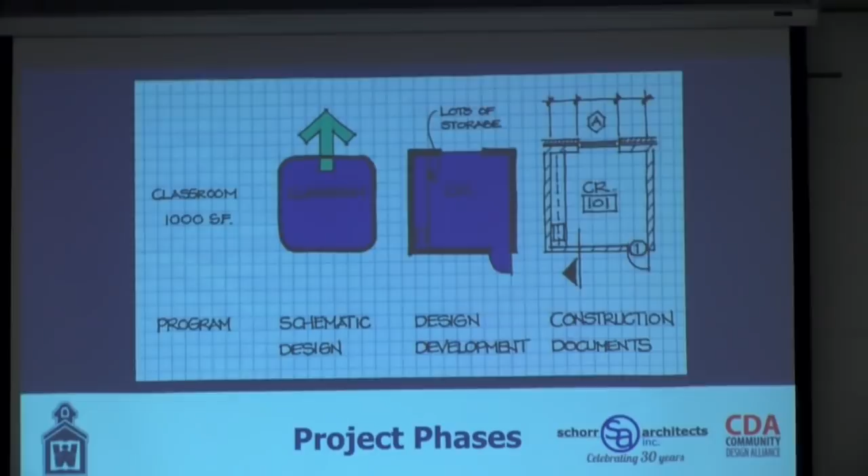Thank you. So the last time, if you were here, I talked about these different design phases, and I just want to briefly tell you where we are. The programming phase, when we were here the last time, we were still in the middle of that. And what that is is a listing of spaces: how many classrooms, what sizes, and it's a formula type of thing where there's a form that has all these different numbers on it. So it's a program of requirements.

We also did a little bit of conceptual design that you saw the last time, and that's what we've submitted. So for Worthingway, we have submitted our programming to the state, because again, we're partnering somewhat with the state on our process, and they are reviewing it currently. And while we're waiting, we have started the next stage, which you see on there, schematic design.

So in schematic design, what you're going to see tonight is more of a floor plan. It is not a conceptual plan, it is an actual floor plan, and you'll see the site plan. We're just starting to develop exterior elevations, and you'll see those at the next community meeting. Hopefully everybody picked up the floor plan outside, and on the back side is the site plan, so hopefully you'll have those documents.

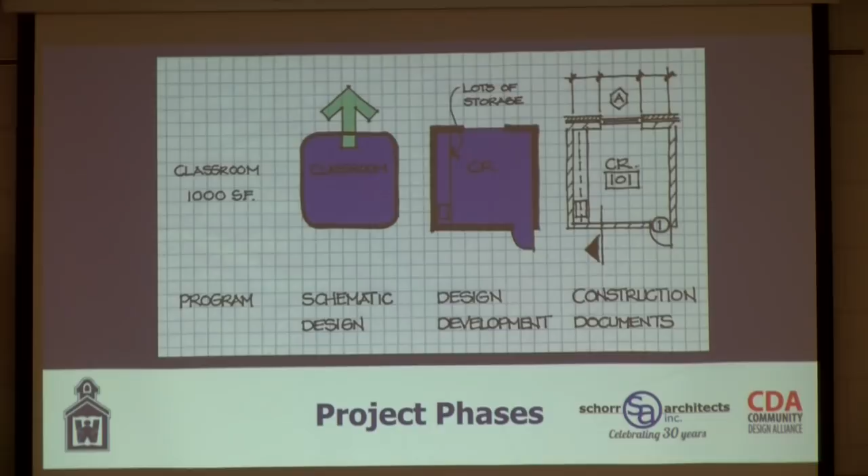So briefly, from those comments that we had received, there were some consistent comments quite a few times. I just want to mention a few of them. Security and safety, I think we all know, is primary, number one, and that was a lot of the comments. We also got a lot of comments about sustainable design and maximizing our energy efficiency, which we will do as we design the facilities. There were comments about outdoor space.

We had a fair amount of comments about making sure, and again, some of this was in the ed spec process, obviously, but that was out there a lot too, about making sure we do create and continue to have outdoor spaces. And you see here, when you look at this design, we have kept the outdoor space between the building and the track.

It has not been taken away. And then there were comments about restrooms. We had a lot of comments about restrooms and gender neutral, and I think you're going to see in the design that it's been addressed as well.

So since we've had our last meeting with you, each school has a site design committee. We had met with them before we met with you the last time. We've met with them again, and even since that meeting, which was just last week, there's been renditions of the floor plan. They've been given to Nathan and the staff here. They've had comments again. There was another meeting today with Nathan, and it's amazing how much has happened in 1 week as we've taken this design and tweaked it. And so there's been some modifications to the plan, and there'll be some more even after today's comments that haven't even been reflected here, but some great comments.

So the other thing that we've done too, which was a comment, and we knew we needed to do this, is we have met with the city of Worthington twice relative to bus drop-off, parent drop-off, parking on site, and you're going to see again I think a big difference to what we had before, because there were great comments from the city. We definitely needed to have those, and plus the community comments have helped us drive our site design.

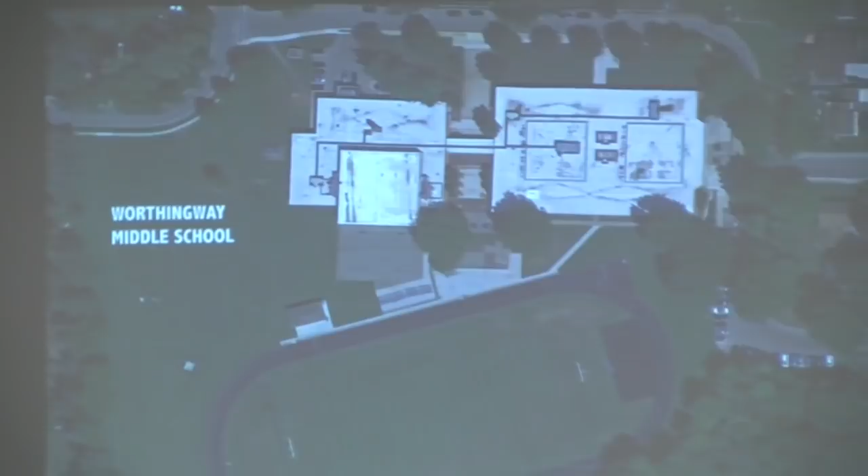Where does the structure work the best? Where does the mechanical and the plumbing and the electrical work the best? And how do we make this a very energy efficient building? How do we make it a very cost effective building? Because it's easy to say, let's start from scratch, let's build a new school, but we don't have that kind of money. So we're here trying to take advantage of what assets we can leverage and replace the assets that we can't leverage.

So this is the existing site. Again, we have got this one-way bus drive coming in west to east. We have Larimer kind of doing a small loop back to Guyer, back to Larimer. It tends to work because people are very practiced at it, but it's very tight, and parking spaces on the site are almost non-existent. There's 25 or 30 spaces here. So the parking lot for the school, as I said last time, is the neighborhood because it needs to flow that way. We're hoping to reduce that demand dramatically with what we're doing. So this is what we presented at the last meeting. We talked about how the building gets used.

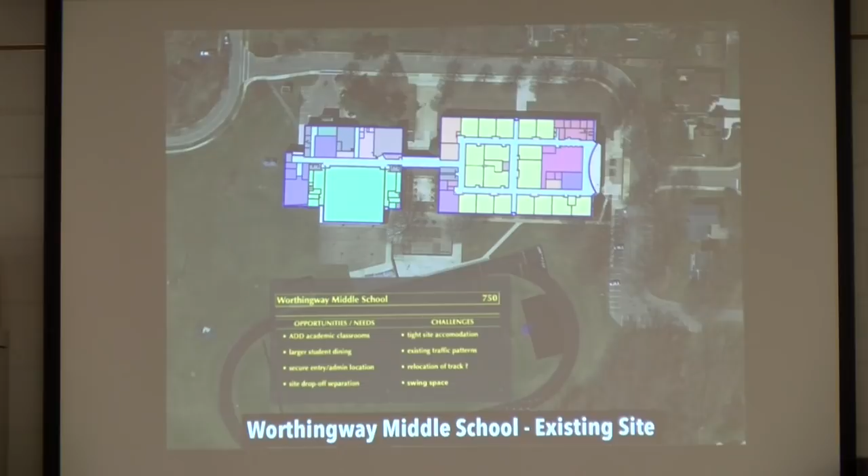The yellows are general classrooms. The other colors are supporting spaces like administration, media center, athletics, art and music. Those are the kinds of things we're trying to rework in this school. And then our number one objective is we have to keep this school operating, and successfully operating, during the time we do this project. So we had to make some decisions that have to do with the transition as well as

the end product. So in our first two meetings, the city manager pulled all the city engineers, all the traffic engineers, all the tree board people, all of the rules and regulations. The fire marshal came in, we sat down and we talked about all those rules. They wanted to address traffic. They didn't want to get into where art rooms and music rooms are, but they definitely wanted to influence how we were going to improve the site.

And the idea that came from our initial presentations was we were still going to have parent traffic here and bus traffic here to kind of keep it the way it's been. The city manager, Matt, said, what if we were to get a much longer, much more flexible, and much larger sort of parent and car drop-off at the north end of the building, take advantage of that, create a new front door, because we're tending to believe we're going to lose our current front door and our current front of the building to demolition to keep the building more this direction.

And so this idea has some strengths, and we're here tonight to sort of see how you react to those strengths. It allows for east and west egress. It allows for people to come in one way and go back out the same way, or come in this way and go out this way. What we like about this is it has a long, open, safe curb where we can drop kids off from cars, and we can get into a secure front door of the school.

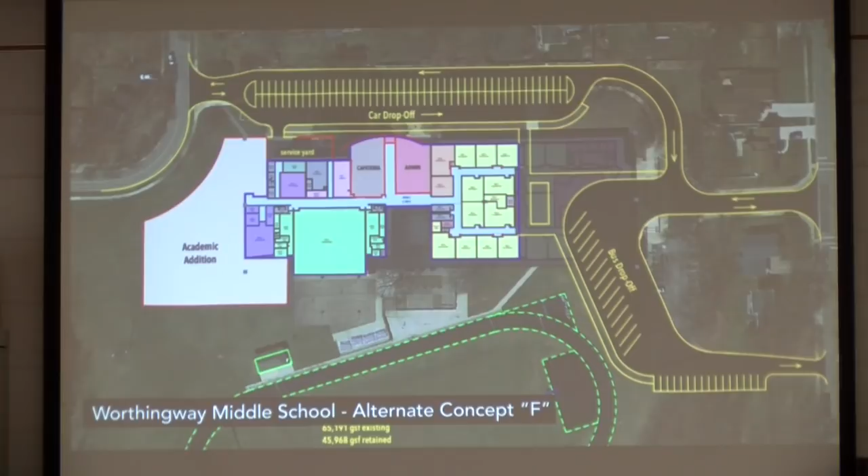And so we're going to really impact the on-site parking. We'll have about 100 spaces up here and maybe 50 spaces more here, and that's way more than we've ever had on this site. It's not a maximum number, but it is a decent number, and I feel like we'll get a lot of people off the streets if we're able to accomplish this. So this is an assumption that the city has kind of worked out with us, and based on that assumption, we've moved forward with the building design to try to adapt to that.

So we got a complete survey of the site. We know where every stone, every curb, every sidewalk, every tree, every parking lot stripe is currently with this survey. It's very detailed. And as we lay our concept over it, we know what we're going to impact. We know what we don't have to impact. Again, we aren't changing any curbs or any edge of pavement on this side of the site.

We're going to expand it to accommodate some parking. That's going to happen because we're going to take some building out here that'll allow that to happen. We have 3 trees here and 6 trees here that we're going to impact with this site design. To get that many parking spaces on the site, we're going to have that. It's not something that I enjoy, or to tell you that I enjoy.

And the city has already said we'll have to replace those in kind on the site in terms of our total tree count. So we'll plan on improving some of the tree cover of the site, and especially focused on replacing these 6 ash trees and these 3 maple trees. And again, not ideal, but safety and traffic flow seem to trump that as much as possible. And so we feel okay about that.

The other concept here, you can see the building that's left, is we're taking half of the classroom wing away. That allows us to do all these improvements in site space. It allows us to have room for buses on this side. It allows us to flip this around.

We're looking at how to make the addition to the building compact, to make it capable of being done while school is in session. So we will build a west addition to this school while the east addition is still being used by students. And when this is ready for them to move into, we'll move them out of this wing and we'll do the changes over here. So there'll be no point in time where there's not enough classrooms on this site for kids. We'll always be able to have a fully operating school here.

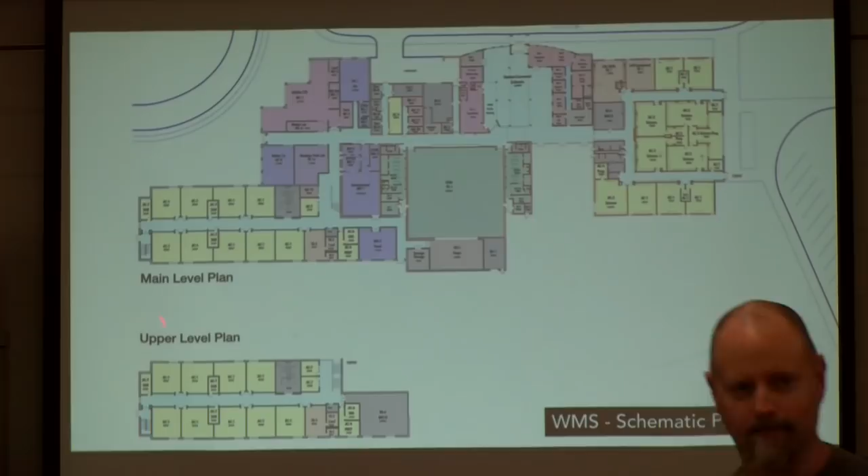The yellow areas are the academic classrooms. We have a STEM wing where we have science and math. We have a humanities wing where we have English, social studies, language, those kinds of things. Someone asked me today, what if we want to go in the future to a team teaching method where we have a science and a math and an English and a social studies room that work together in teams? That can happen. We know that our existing science labs have a few special features, but not that many. They're a little bigger, but not a lot bigger.

If we decide to rework this school down the road, I don't think we're doing anything that's going to prevent us from teaching differently. And that's a huge goal for us, is not to limit you in terms of telling you have to use these rooms as science rooms. They'll be better equipped as science rooms, and that's what they've been for the life of this building. But any building or any classroom in a school could be a science room 10 years from now if you want. So I think that's important to understand.

The concept here, which we got the staff to really buy into, and they can weigh in on that again tonight if they feel differently, is we do have a little bit of a separation in the academic wings. Like I said, a STEM wing and a humanities wing. But what we like is we got all the core spaces in the building around the existing original core space in the building. We don't have to reprogram any space around the athletics. We're going to use all that, rehab it. We're going to use all this space. We're going to create some new core space here that the building needs desperately.

A larger media center, art rooms, redo music rooms, create a new vocal music room, and really important, create a really large stage off the gymnasium. And this is a 1,400 square foot stage. I'm going to say it's about 2/3 the size of this room, just the stage. And that stage will be elevated. It will allow for performances. The gym will be the house. That's not perfect, but it's pretty good in a middle school. And this gym, I think, will function pretty well because it's pretty large.

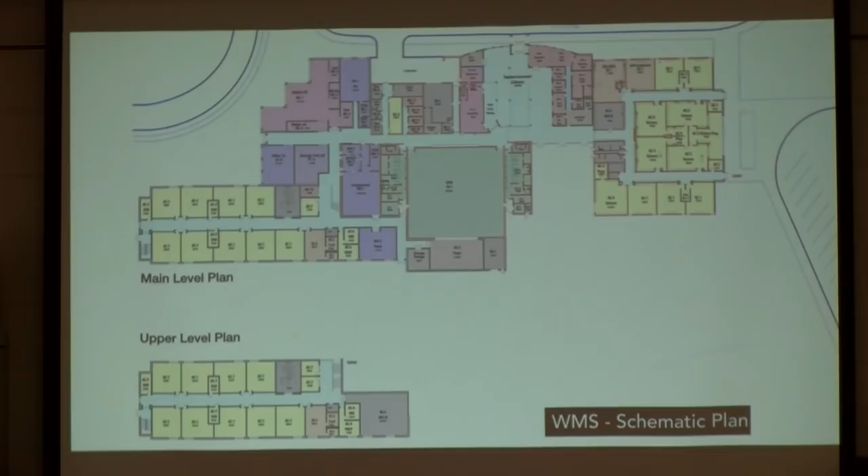Good question. We did want to not put too much footprint on the site, so we are stacking a second level of classrooms here above this level in our addition. Again, as I said last meeting, the 2-story gym will be about the same height as the 2-story classroom wing, so we're not going to have a taller building. We're going to have a little bit wider building from east to west.

Tony brought up the issue of family restrooms, unisex restrooms. We have targeted two new ones in new construction, but also capturing 3 new ones in old areas of construction as well. There'll be 5 places in this building where you can use a restroom that's a unisex family restroom. It'll have changing tables, it'll have a toilet and a sink.

It'll be for all those reasons: a father changing a daughter's diaper, a student who wants to not use the women's or the men's or the girls' restroom, anything, a teacher who wants to have a private restroom. Those are all available, and they'll all be extra large, handicap accessible, and they'll support all of those uses. So we have those spread out in all of our middle schools.

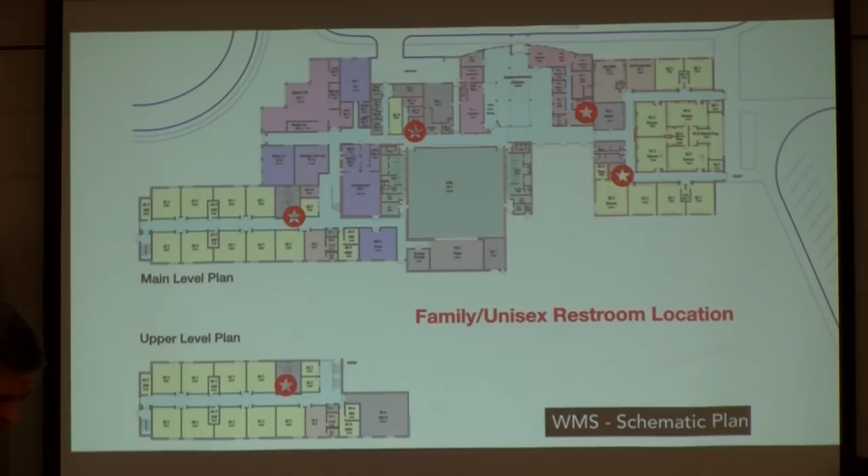So here's our new entrance. And the big idea is this is more than a cafeteria. I love that because cafeterias don't get a lot of use other than things like we're doing tonight. This is going to be 4,200 square feet. This cafeteria is about 1,900 square feet. So imagine 2.5 times the space. And in fact, right here is this space. It's about 1/3 of what will now be the new student commons.

What's different about this is it will be the front door, the entry sequence of the school. It will be a place that the traffic in the mornings and for nighttime events comes through. It'll feel more like a student commons than a student cafeteria. Although we'll use it as that cafeteria, we'll have table layouts and furniture layouts that are going to be a lot different than just the folding bench tables that you see in current cafeterias.

What's better than that, though, is when school starts, these doors electronically lock, and all visitors will be buzzed into an office and meet with a person. They won't have to wander the hallway and find the office. It's going to be a secure entrance. They even get a shot at not buzzing them in this door if they feel like it's a person who is threatening. But every person will come and visit the staff in this building directly and not be buzzed by a vocal buzzer on the outside of the building.

They'll come into the vestibule out of the rain, and then they'll be buzzed into the office, and they'll be able to come through the office. We have the office stationed here because we want it to be part of the welcoming sequence of the school. We also want it to be part of the security sequence of the school. So we have principal, assistant principal, and all the support spaces for administration here, because again, the administration area of this building will be going away, and it needs to be part of this.

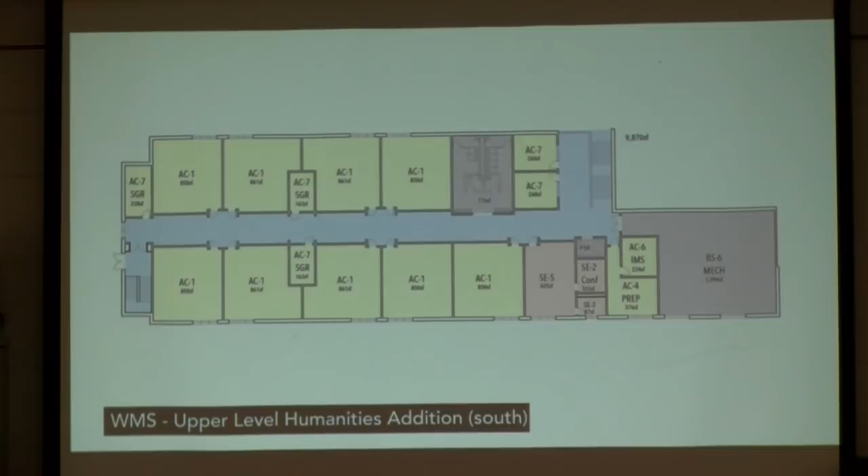And as we look at that curve, I kind of stood there for a long time with the engineers. There's this shelf kind of edge that goes from this telephone pole to the start of the bend in the curve. We're going to build everything kind of in this area, but we're not going to cover this entire footprint. That tree actually isn't even going to have to go away. If you look at where the footprint of that floor plan sort of sits on this site, we will come out a little bit past that pole, but we'll stay up on this upper level. We won't get into this lower level or this really low level down at the creek.

We won't be that close to any property lines. Our closest property line encroachment will actually be to the city street. And the city's already told us we will need a variance to be within 50 feet of the street, which we already are. The current building is within that 50 feet. So we'll have to process that variance, but this would be how that looks. There's still going to be a lot of green space here in front of the school, and we're saving the maximum amount of green space we can in the back of the school.

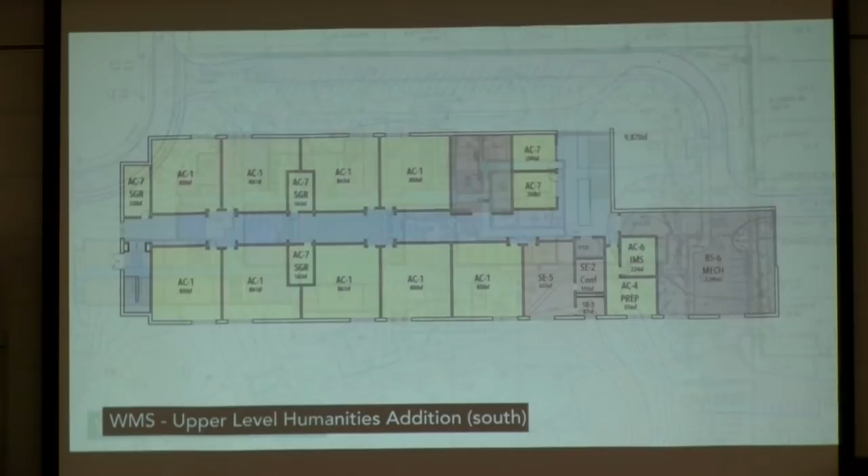So I wanted to just sort of give you that sense of where this is going to be. We back up all the way to the site survey. So we're coming to here. We're going to keep all of this green space, and we're going to keep all of this green space. And obviously the track does not have to move, which we like because it's an investment.

We're going to save about $7 million of the existing structure. We're going to save about $2 million in site development, and we're going to move that forward into a new project. So our $20 million, $22 million investment will actually feel like a $30 million investment because we're going to be able to use a lot of what's here. I think that's a plus. If we spent a lot of our money rebuilding things that we already paid for, we'd just be getting back to even, getting back to zero.

And I think what I like about this scheme, it's not perfect. There's some compromises. The staff has been amazing in terms of helping us figure it out. I think it works really well, and it preserves as much of our investment here as possible. Where's the tree on the site survey? Right there. Okay. So this is going to step out, and then the classroom elevation is going to tuck under it. It's going to be right there near the front of that door.

The sheet has it somewhat over. Yeah, well, again, I'm using a wide-angle lens picture off of Google Earth to make that assumption. You might find me a little bit close. You're right, I'm a little closer than I thought.

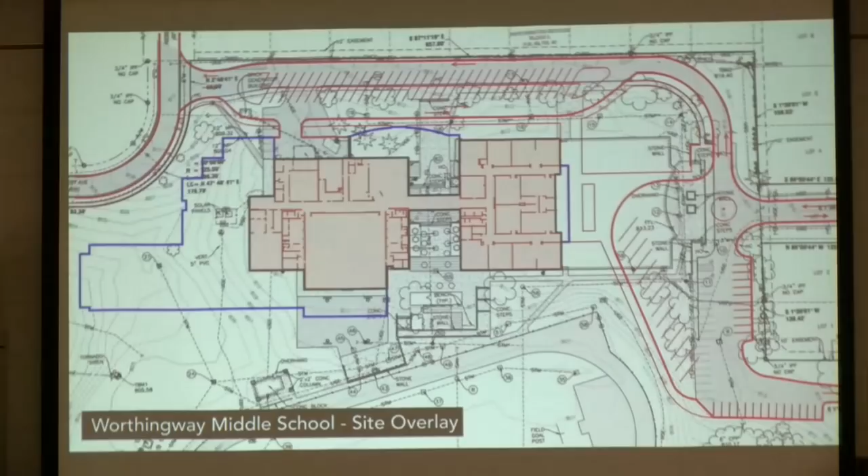But there's a drop of about 5 feet though, right? Well, I'm really staying up in the top part. There's probably 3 or 4 feet of a drop from the corner of the building to here, but the real drop starts here, and then the heavy drop starts here. So I'm trying to stay up on what I call the top shelf of the site. But you're right, 4 or 5 feet, that's probably reasonable.

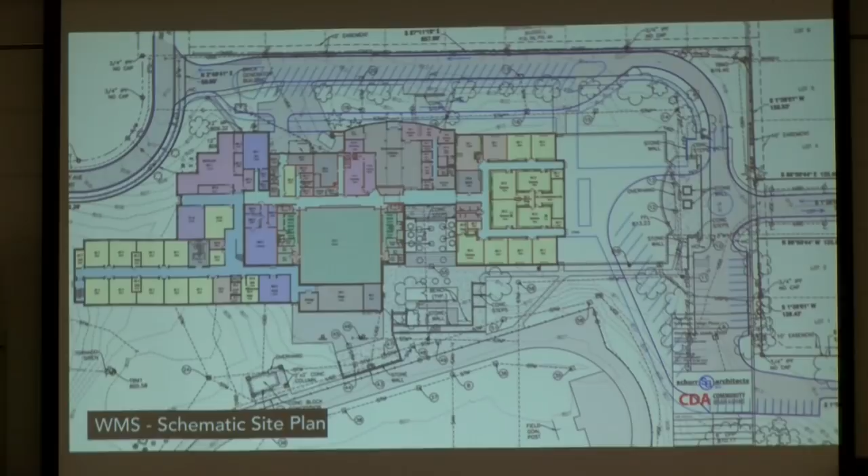So what kind of questions? Yes? So you may address this later. If you are, just tell me. No, go. This is time to address it. So the exterior of the building. Quite frankly, it looks like it has lived its days, 1960s design. What's being done to address that to make the school better?

Okay, so we're not there yet making decisions, but here's my opinion, and maybe you share it, maybe you don't, and I'd love to hear it. It's a low-slung building. It sits in a neighborhood with houses. When I build 2-story schools with really steep, traditional roofs on them, and you drive down the street and you see all the houses coming up to the middle of the 2nd floor, then you see this giant roof behind them. It's a little heavy duty.

I would like to break open a lot more windows in the school. I would like to keep the building low slung. I would like to put larger overhangs out over the roofs so that we can wall wash the windows with light. We can do some things that make the building have a new color palette. We can mix up some brick colors, but I think we'll keep the building low slung with what I would call slab roofs. They'll look thick, but they'll be low slope. They won't be high slope gables.

I didn't feel like gables belonged here, and I think if we used them, we'd really overscale the neighborhood to all these houses that are around us. So I think it'll look mid-century modern-ish, but it'll have some contemporary details on it. We're going to use brick, glass and steel, lots of curtain wall and aluminum, so it'll have nice commercial building materials on it. No wood, no plywood, no stucco, no Dryvit, none of that stuff. It's going to feel nice.

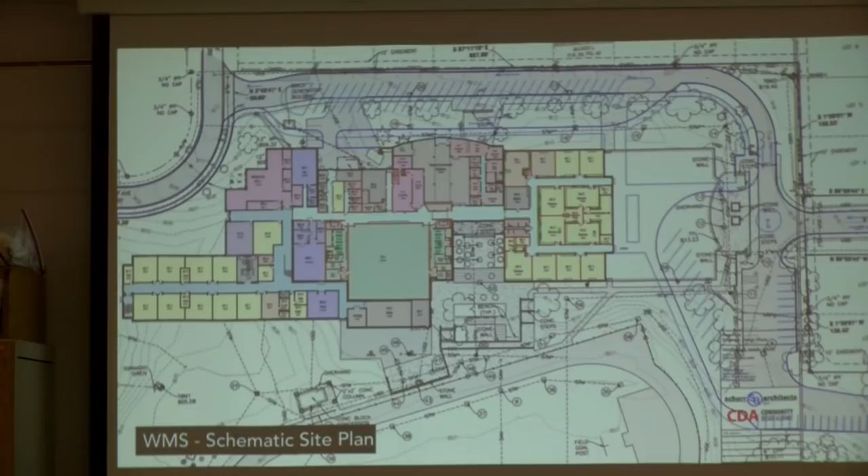Yes? I'm thinking a lot about the walkers and bikers that get out of the school. I know you said there were not going to be any changes to, maybe I don't have the right verbiage here, the roads, the way you cut into the neighborhoods.

But is there an opportunity to create a bike or walking path at this southeast corner, right over there, at the bottom where the bus is? Right now you'll constantly get kids biking and walking in there and out of there, and there's no safe spot where they can be on a sidewalk, out of the flow of traffic.

Okay. I don't know if... well, that's something. I have a 12-foot sidewalk here to unload kids from the buses, right? But I really probably need to take it out to the street to do what you're saying. Right, you want kids to be able to not have to cross over.

Right, and I don't think that's a bad idea, to come along the bottom edge of the parking lot, let those people get onto the sidewalk, but also let bikes and walkers get in. And that's the right side of the street to do it too, because then you never cross traffic. Then you've got these walks that are gonna allow it, and the fire department is gonna make us have some kind of drivable surface around the building for fire protection that also could be integrated into some walking and some biking.

And then it seems like you took all the spaces where the bike racks are. We have to recover those because LEED requires them. So we will have all new bike racks up here somewhere near the entrance, and probably over here as well for kids who are coming this way. Yes, they come from all sides, and that's a side where I think there's just been a lot of danger. Lots of plaza here because of where the old building was.

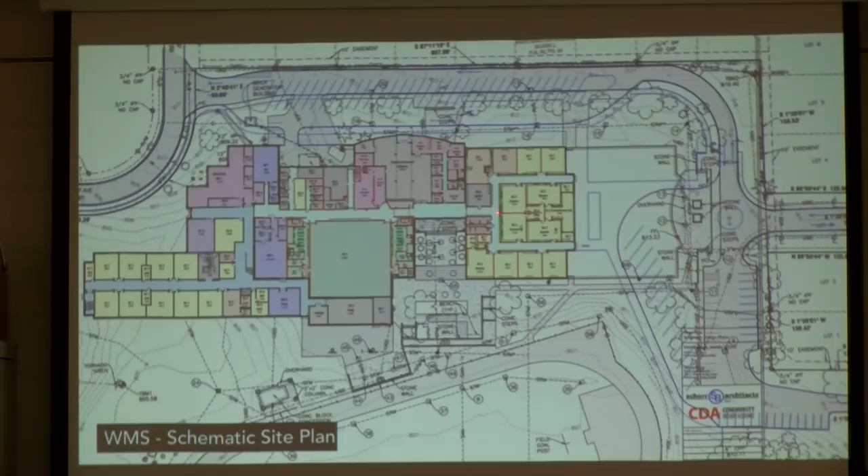And the question would be, do we make those kids come down to the cafeteria, or do we let them get into their locker and get into their science classroom early? I don't know. So the kids who live over here? They will walk down this sidewalk and come in the front right there. This will be a door, but it won't necessarily have a sidewalk to it, because we're not trying to encourage traffic. That's really for exiting and for safety.

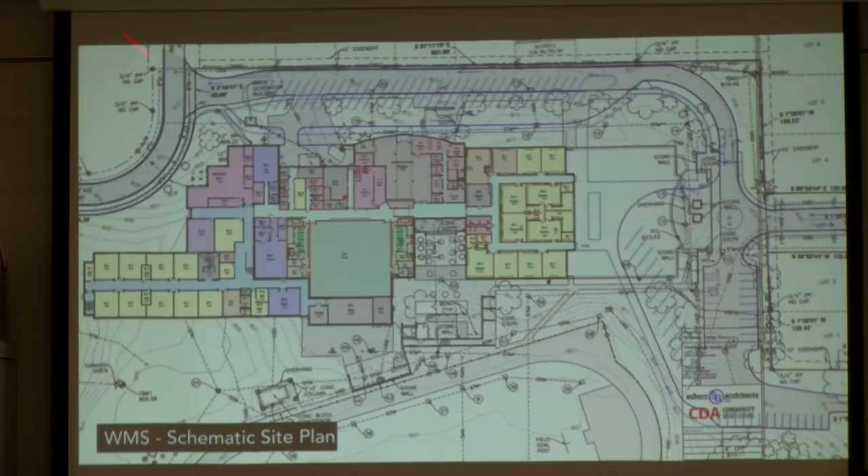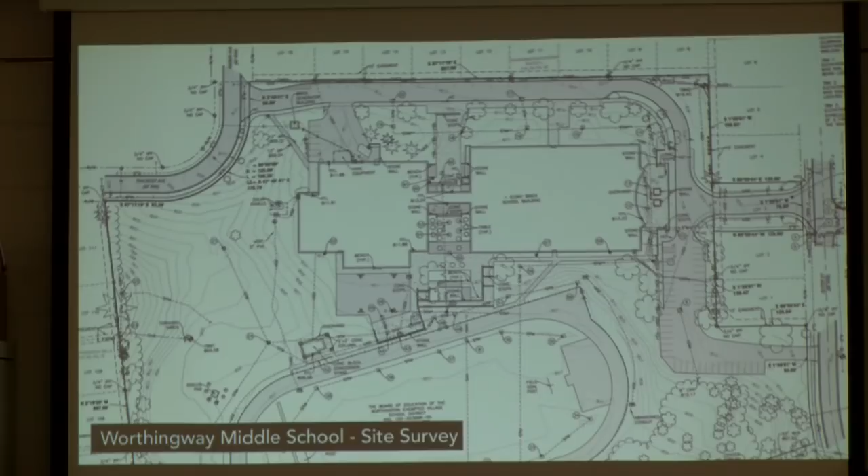So for those of us on the north side, the few of us whose backyards open up to that parking lot area, we currently have a lot of people who tend to speed both ways through that area. Since that will now become a drop-off zone, will you put in speed bumps or any type of deterrent to slow things down? Great idea. Speed humps, they're a little safer than speed bumps. I'm just thinking of my child walking out that back door and someone in a real rush to get their kid to school. I agree with you.

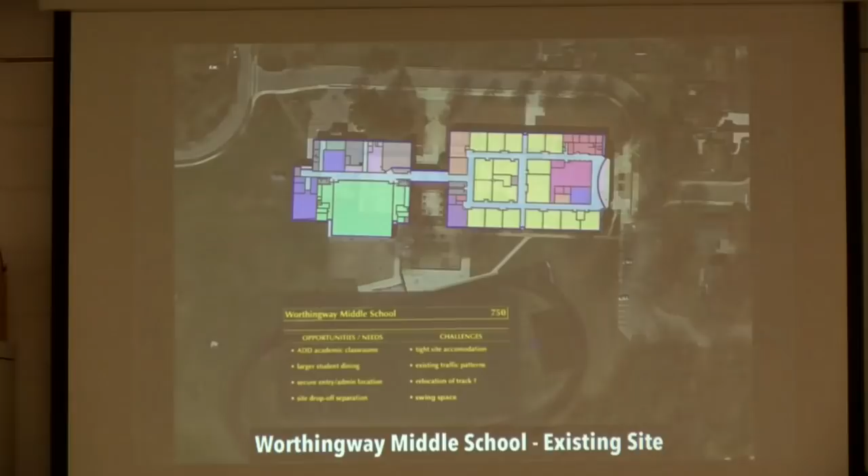How is that going to work? The good news, which is a little challenge for us, is it's pretty tight dimensionally. We're gonna have two tight lanes, so you can have a parked car at the curb dropping your kid off, and a car can get around them. It will compel people to go slower, but I think the idea of some humps is a good one, that would slow them down. Currently they can't do anything like that because the buses go in that back lane, so that's not feasible.

And there's also vehicles... I'm willing to put gates that lock. The curb, I think, is the more important spot to have those, because if there's a sidewalk that goes along there and then a crosswalk to allow people from Geyer. It's separated off the street. I like the way the sidewalk is now, but what happens to connect from here to here? I'm for gating this when it doesn't have to be open, at certain times.

There's a pedestrian walkway that connects right there. I mean, there's a jump from something there to there that we have to figure out. And I'm not sure we can get rid of it, we've got to cross traffic, but we certainly minimize the interferences of traffic that we have today. And I'm with you, we want to make sure this is not a cut through, so I want to discourage that maybe with some gates or some cones, and we also want to make sure it's very slow, 10 miles an hour.

Yes? Looking at the buses pulling in, I'm wondering about student safety getting on and off the buses. If they're gonna pull forward, pull out, or? They pull forward. They pull within 3 feet of the curb, and the door is right facing the curb. The kids get out and they step off. When the buses leave, they turn their wheels and they go.

And I thought literally, they were pulling into those long spaces. They are, but they don't have to turn to get out of them. They turn their wheels and they just take a left, and they go off without getting onto the sidewalk. And again, kids are in the buses and the sidewalk's clear before buses start to peel out. They arrive in whatever order they want, but it's very safe because the door is to the curbside and nobody ever backs up. In fact, I'm not sure buses are allowed to back up in a lot of jurisdictions.

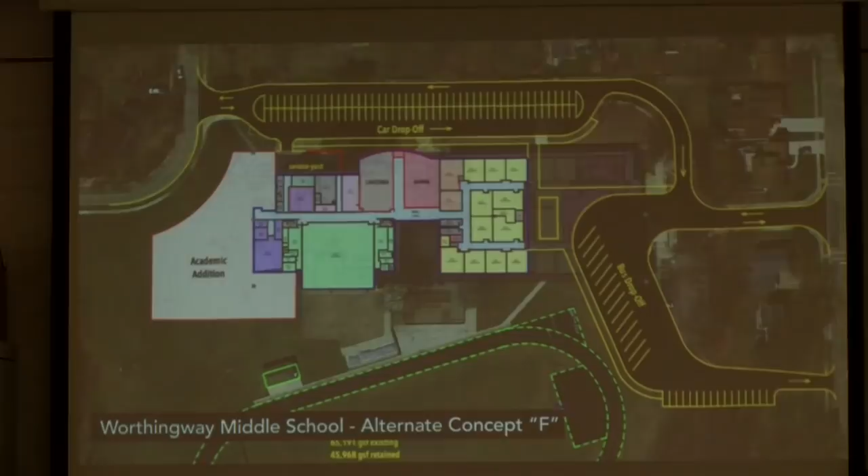Good question. Yes? Would there be an opportunity to fill in the one little square where the glass hallway is now into like an auxiliary gym or something? Where are we, oh, here? Yeah. You know, there's a lot of development there in the site plan, and we talked about the pros and cons of both courtyards. This one seems way more engaged in the outside activities of this building, and it seems way better from a safety standpoint to keep that there.

We played around with putting the media center there, we played around with putting more space there. We have all the space we need, but it doesn't say that we couldn't take something from here and fill that in. I just felt like it was getting too much around the building. We were sealing in too much of the old building, and that was going to create a lot of construction headache, because when we build, this is going to be our safety way out, because we're going to close this courtyard off with new construction for a few months. That courtyard is where the kids spend community time too.

Right, and I would like to see it improved. I would like to see it become really, really special and become part of all this space. I'm really liking what I see back here, and it's in decent shape. It's not in perfect shape, but I think it's part of the future of this. And we've got to struggle with that at every middle school, is what do kids do outside, especially now that 6th graders are coming. They're going to want to spend time in what we call recess outside, or maybe 7th and 8th graders aren't as interested. But we've got to think about 6th graders and what they do outside on this site.

Yes? To kind of dovetail off that, I noticed that the addition off to the west, in order to put things like the stage in next to the cafeteria, is going to cut into our existing basketball courts. Could you speak to how that's going to work?

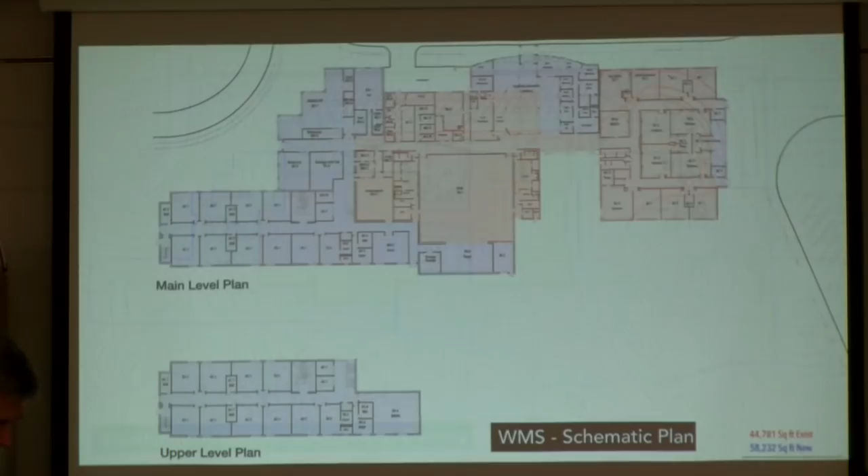You're talking about the stage next to the gym? Yeah. So that previous slide looked like it was going to come out and take out part of the basketball courts. No, the gym is going to keep its entire footprint. We're going to break an opening in the outside wall of the gym and build to the south of it. The outside of that. Oh, you're right.

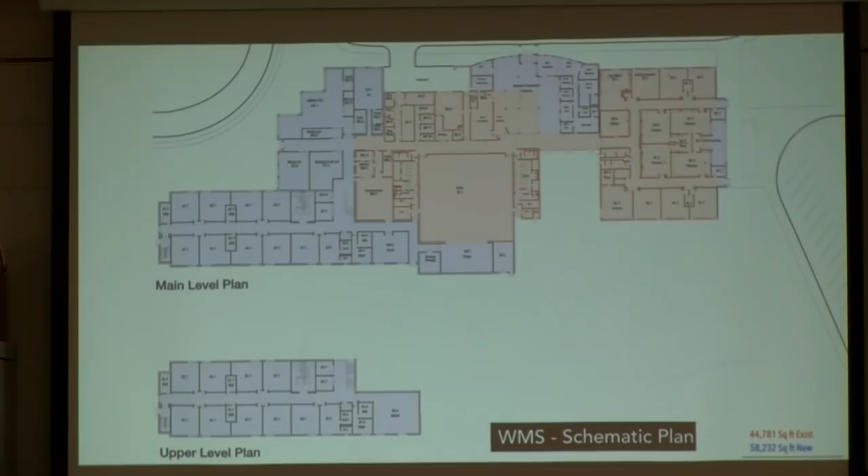We have to replace those in kind somewhere on the site. We're not there yet. And that's one of the few assets that were taken out with that addition, but you were very right. Because I know a lot of our kids really like to utilize that space of the basketball courts. We're going to get into that. We're going to have to move those over or move them down. We're going to have to figure that out. No rush. Great point. What are the build phases?

I think, and again, this is more of the contractor's discussion, we'll build this first so that when we're done, we can move everybody from this wing into a new school. And then we can take some time to renovate these rooms and tear down this wing and finish the school. But this will probably start right away, maybe this fall, with foundations and shell.

We won't disturb much on these walls. These are all fixed, and it's all space that isn't activity space. We'll be pretty good in this phase. It's going to get hairy when we get into this phase. But if we can move all these kids into here at some point, then we really have a good shot at not disturbing people while we do this phase. So I see it as 1, 2, 3 phases. And I'm not the person that's going to make that decision, but it's kind of generally what we think.

You seemed to allude last time that the structure of these buildings is not all that great, and that's why you wanted to tear down this old part and rebuild a whole new section. So the thought of keeping the front section was okay, but how about now that almost the whole building is going to be?

Well, I call them thin buildings and thick buildings, and Kilbourne's a thick building. It's different. You can stack it 3 stories. You can do all those things. When the board asked me if we could build up here, I said we can't unless we start over at the footings because it was only designed for 1 story. We're going to basically take this building and sandblast it down to structure. We're saving the structure of this building. We're saving more here because this is a heavier construction side of the building.

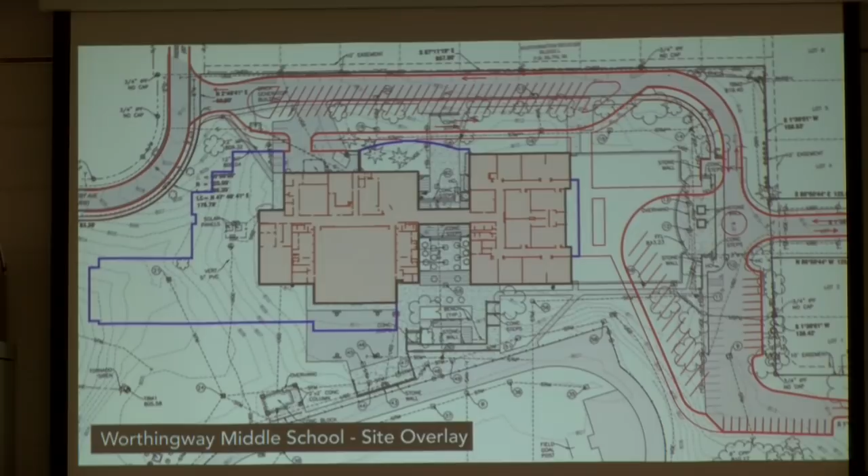Well, I think it's still a two-story addition of that size, where the neighbors live around to the west of the school. I still think that that's very close. Now, it gets to here. I don't think it's going to impact these folks as much, but this person across the street is not going to have the view of the track that they have today.

But again, it's a 70-foot wide addition that's coming out, and it's staying pretty centered here. I don't know how we could do it otherwise. If we kept it all at one story, we would definitely be covering this entire green space. The rest of the addition to the west of the gym, it's not two-story? It's coming all the way to the street. It is, but it's going to be just one story.

It's going to be a stepped library wall. It's going to be the media center. It's going to have nice lighting, nice views, nice windows. I don't think it'll be very intimidating at all, and it'll look so much better than this wall looks today. This is going to be big volume, I know, but it is, to me, the best way to make this entire site as important as we can with bus safety, with drop-off safety, with green space, with tracks.

It's all balanced. And I agree with this comment on the fact that they realize they're trying to save money by trying to avoid closing the school down entirely. But I think he really shortchanged the opportunity that we had of trying to keep as much in such a small, compact space and build something with much more capacity.

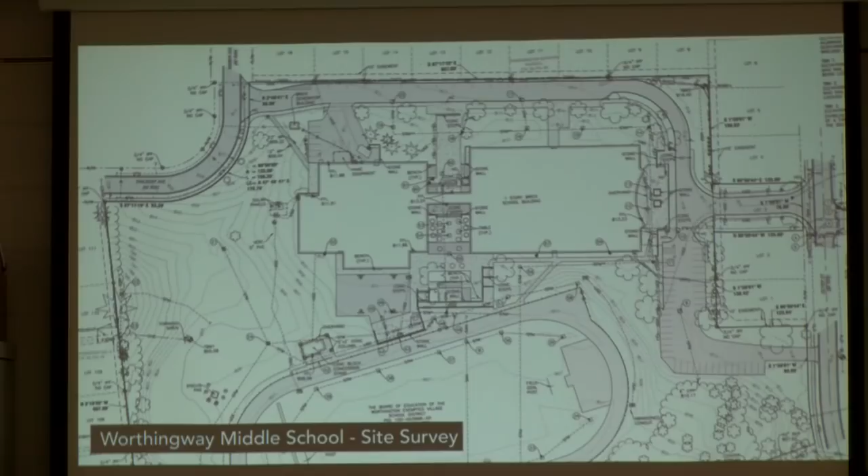This is purely my opinion, but if we were going to replace the school by scraping it clean, we wouldn't build it back here. This is too hard of a site. The state might not even let us do it because it's not big enough to hold a 750 student middle school. It's an important site with a lot of assets, and I would rather see it be a school that's a little big than 18 more houses, because we would build this school somewhere else if we were going to start from scratch. It would make more sense, in my opinion.

So you could, I'm not speaking for the district, put a bigger addition on some of the other sites that have more room. This is all about balancing the enrollment in the district, where the kids are coming from, and I would hate to see a Evening Street kid go to Kilbourne because we didn't have room for him at Worthingway. It just makes no sense that these folks in this neighborhood aren't going to this school. And again, that was part of the district's promise.

It has nothing to do with architects, but putting kids in a track that means they go together with their friends from elementary to middle to high school makes a lot of sense, and I've seen it happen really successfully in other districts.

And one of the things you can't lose track of is even if you did a clean rebuild, if you did it in the exact same spot, you don't fix the parking issue. So you would still have to rebuild offset closer to the west. But you still have all the site challenges, no matter what. We're still going to have to do something, and I think this is a good compromise of cost and aesthetic. You said something, I just want to clarify. Yeah.

Or at least confirm that I heard and understood you correctly. You said that the two-story addition would be about the height of the existing gymnasium. So when we go outside and we look at it, we shouldn't expect the height to be more. Draw a line in the sky from the gym out, just 70, 80 feet, and that's what you'll see. But not the part right at the street. That will be the part that is one story. It's actually pushed back. But this piece that comes out like this will be the same height as the gym coming out.

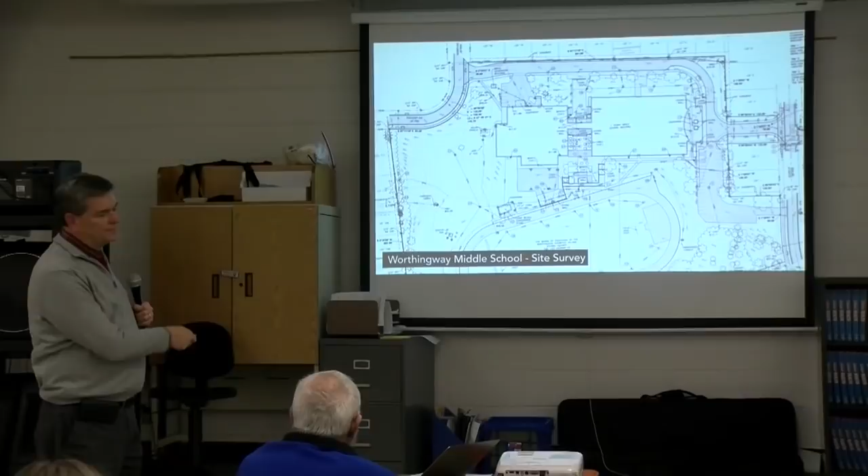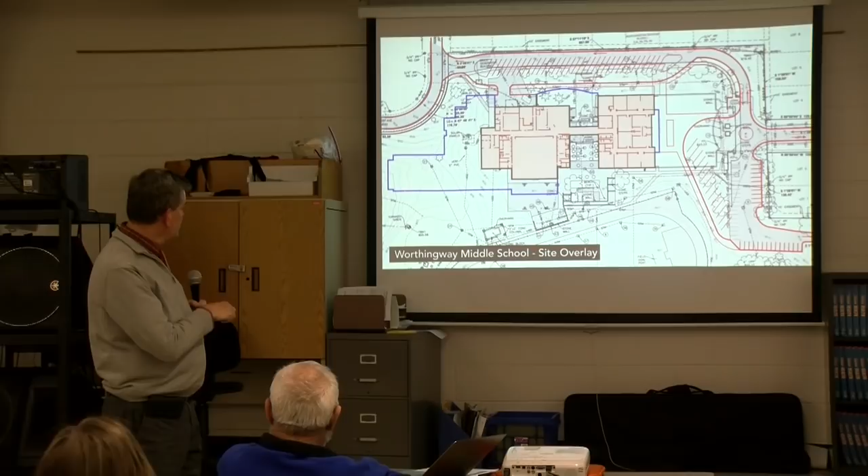Yes, sir. When you address the west facade of that addition, the topography there shows that you're going to have about 9 to 10 feet of exposed foundation. Well, we'll grade around there so we're flush. We want to walk out of there on a pad. It'll go downhill pretty steeply from there because it does now. But we'll have a little bit of a flared out edge. These grades here will probably be flush along the edge of the building. You won't see foundation. You'll have to have an exit there. That's a lot of slope, so that's going to have to happen maybe up 9 feet.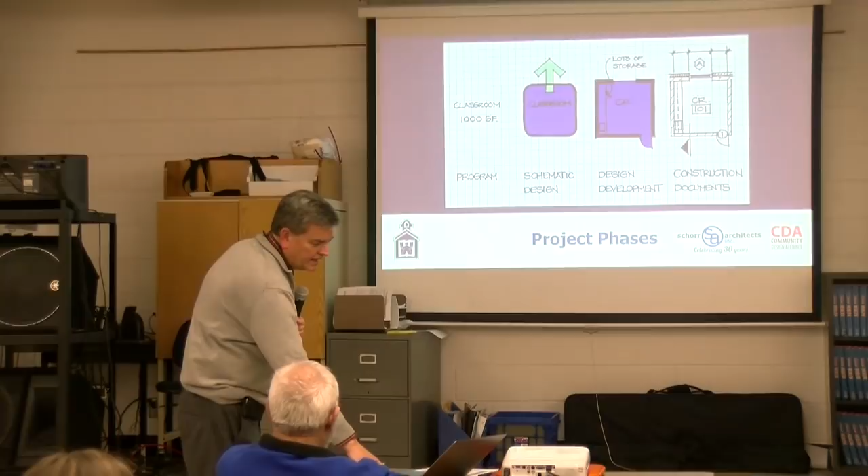So, you've done a great job handling the on-site traffic. That traffic flow is a big deal to the neighborhood, and kudos to you for thinking about the circulation and the bus pull-ins and all that. Do you have a rough percentage of the amount of pavement that you're adding? If we have to contain the water on it, we're probably adding maybe another 1.5 acres of hard surface. This site was regraded and subsurface stormwater management was installed, when? 2016, with the track, yeah. That's right, the track was done. So, what's your plan for stormwater containment at this point?

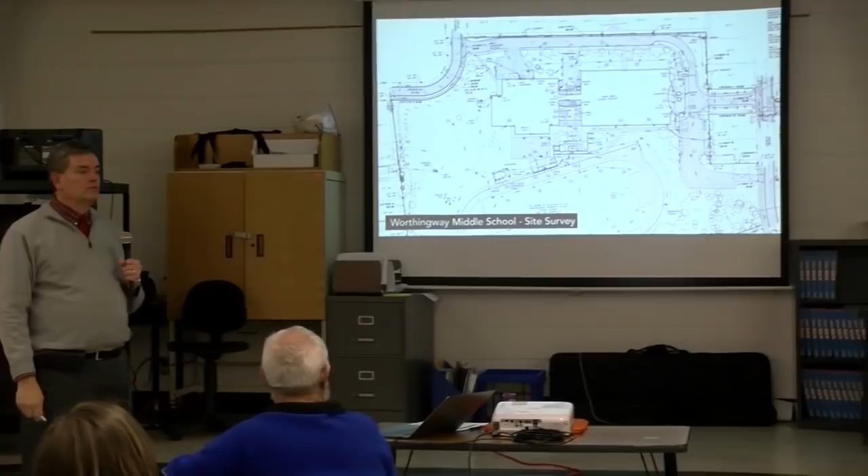Michael, speaking of the surfaces that allow rainwater to seep through, have you been over to Easton for their new gateway addition over there where they use that brick type paver? Yes. Has there been provision to maybe do that in our areas where we maybe don't have buses? So no buses, they will wreck that pretty quickly. The bus is too heavy, but yes. But our other plazas, our walks, those kind of things might all be that pervious block type of thing. There's a cost to it, but it works very well, and I do like it. So those are great ideas.

And again, we're concerned about water quantity control, but we're also concerned about water quality. So when you run water off a parking lot, it goes with sand, it goes with salt, it goes with grime, and it goes right into a creek. What water quality control says is you have to let that water stand somewhere so that that stuff sediments out, and then the water that goes into the creek is clear. And you don't want to put sediment in the creek. So we have to be thinking about those pervious pavement things for not just water quantity, but they'll also do great things for water quality. And that's a good thing to do.

I built a high school over a Miller Beer brewery area. They said the salt on the parking lot at the high school would be in Miller Beer in 7 days after it left the parking lot. That's how fast it would weep into the aquifer. So we put bioswales in the entire high school site, and we absorbed all that stuff before it got into the Miller Beer in 7 days.

Michael, just an observation at this point, without seeing elevations, without seeing the next step. Stepping back that 70-foot addition may be helpful to the neighborhood. The first story is a big rural box, and you're going to have another one stacked on top of it. That's a harsh transition. And you're stepping down with an elevation. To Josh's point, you've got an elevation shift in there that's going to be awkward. So you're saying step it maybe a one-story section and step up to 2 stories and go further back? It might play nicely with integrating into the site. If you can pull it back, you can keep a 20, 30-foot step down there. Build the mass on the second floor, pull it back to the massing of the gym. You see what I'm saying?

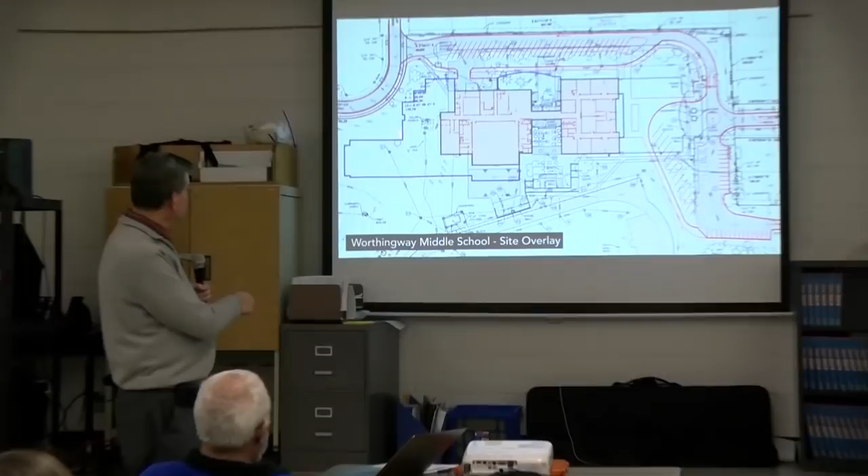So there's a lot of lockers down here. Where will lockers be? All the new hallways are locker-able, but I haven't heard yet that lockers are the future or the answer, but we're making this building locker capable. Are there any outdoor classroom opportunities? I love this space. It can continue to do that, but I think there's some opportunities. We talked about this door out here. I think there's some opportunities here now because it's going to have a much bigger space. I don't know the rest, but I hope there's lots of outdoor opportunities.

I had one more question. With regards to the solar panels that are out there, how is that going to be affected? We've got to move them. I don't know what we have to do in terms of the wiring and the cabling that gets to the generator system, but we have to move the panels. They're in the way here, but we'll keep them. So I'm assuming, with us looking at energy costs and all that other stuff, they would make sure to use them. I don't personally know how they're using those solar panels, but it seems like a great opportunity.

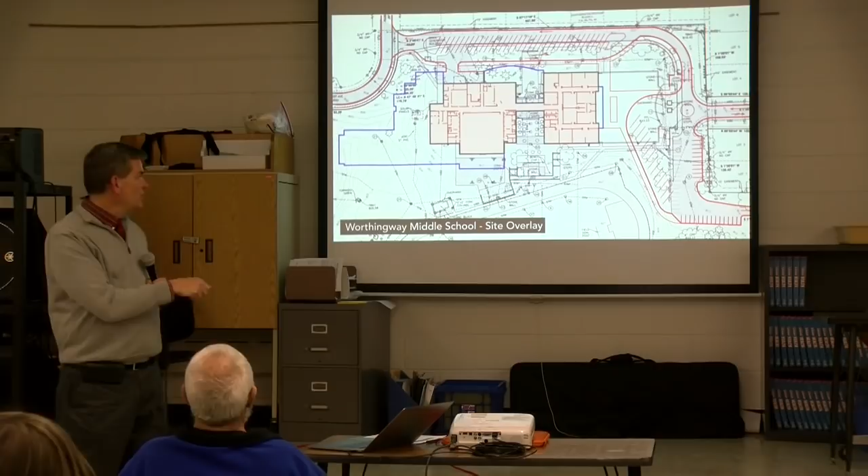They are expensive, but they're fantastic because they create free energy. By rule with the School Facilities Commission, we have to create what we call solar-ready buildings. So we have to build all the roofs on all the schools, old and new, capable of carrying future solar panels. If we cover the entire roof with solar panels 10 years from now, the structure had contemplated that from day one. I'm not saying we're going to buy solar panels to cover the roof in this project, but we will be able to do that anytime they become reasonable and affordable. Considering replacing it? We're keeping it in kind. It's too important as a learning tool and as an investment. We don't want to lose that.